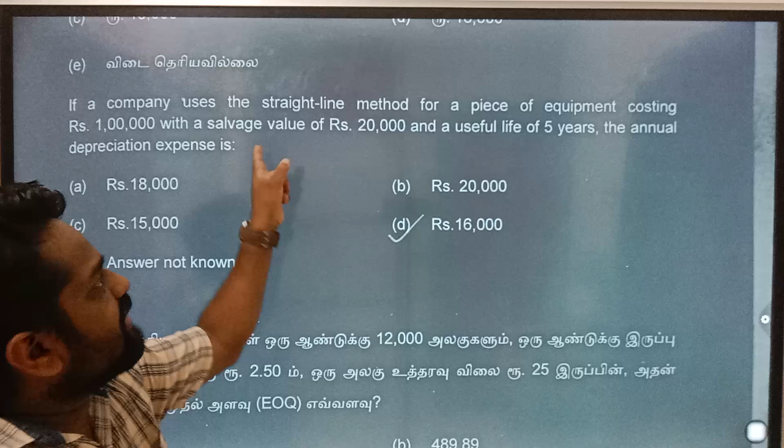Next, again a problem. If a company uses the straight line method for a piece of equipment costing rupees 1 lakh with a salvage value of rupees 20,000, and a useful life of 5 years, the annual depreciation expense? In the question, the confusion is, what is salvage value? Salvage means current value, current book price. Okay, so depreciation is 80,000. So straight line method, 80,000 by 5, 16,000. Answer is D.

10th question, for a product with a demand of 12,000 units per year, holding cost of rupees 2.50 per unit per year and ordering cost of rupees 25 per order, what is the economic order quantity? Economic order quantity direct equation, root of 2DC by C. Okay, அந்த equation கொடுத்திருந்தா டைரக்ட்டா ஆன்சர் கிடைக்கும். Answer is B, 489.89.

Next, a company uses ranking method of job evaluation. If the highest ranked job is given a score of 100 and lowest rank a score of 40, what score would a job receive if it was ranked in the middle of a set of 9 jobs? ஸோ ரேங்கிங் மெத்தட் தான் கேட்டிருக்காங்க. Next, ஜாபுக்கு ஸ்கோரும் கொடுத்துருக்காங்க. So we are not 100% sure, but the answer is not known.

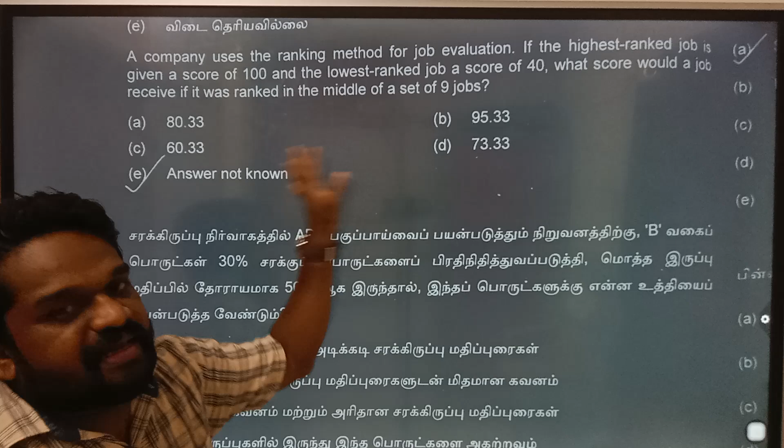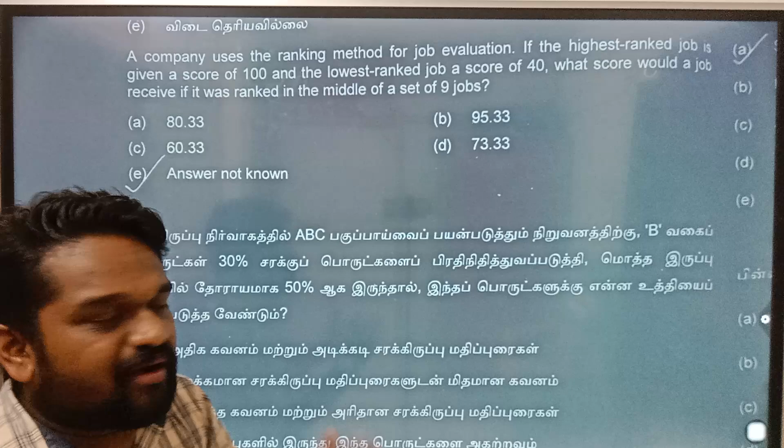It should be not known because ranking method is a qualitative method. No quantity; quantity means points, we don't give them. So you cannot ascertain a job by assigning points or score. So ranking method is a qualitative method. It does not involve points. So answer not known. Okay, so answer is E.

12. For a company employing the ABC analysis in inventory management, if B category items represent 30% of the inventory items for a cost of 50% of total inventory, then what strategy should be used for these items? Inventory monitor பண்றதுக்கு என்ன strategy யூஸ் பண்ணனும் அதான் கேட்டிருக்காங்க. The answer is moderate focus with regular inventory reviews. Moderate focus means it is a B item. Regular inventory reviews because they are 50% of total inventory value. So you need regular inventory reviews also. The answer is B.

Which one of the following is not a form of inventory? Inventory la include ஆகாதது இது எது? Raw materials is a part of inventory. Work in process is a part of inventory. Finished goods, again part of inventory.

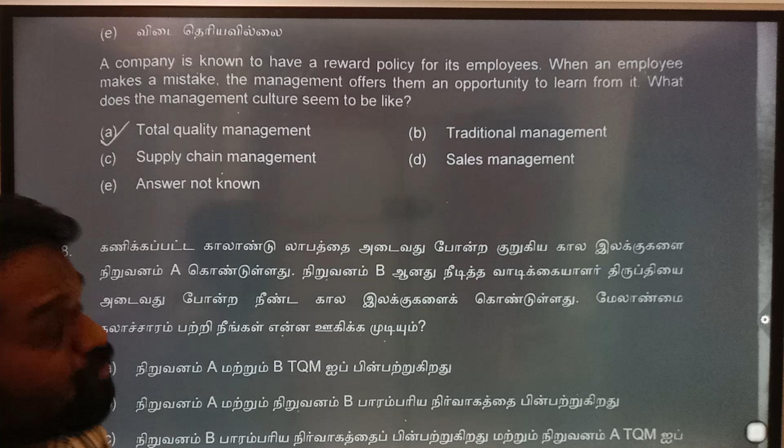Next, a company is known to have a reward policy for its employees. When an employee makes a mistake, the management offers them an opportunity to learn from it. What does the management culture seem to be like? So, a very friendly management culture. Oru traditional approach illa. Adinala, this is a feature of total quality management. Okay, baaki irukku onnu illa. Traditional management onnume illa. Idu rendum not related to this question. So, answer is A.

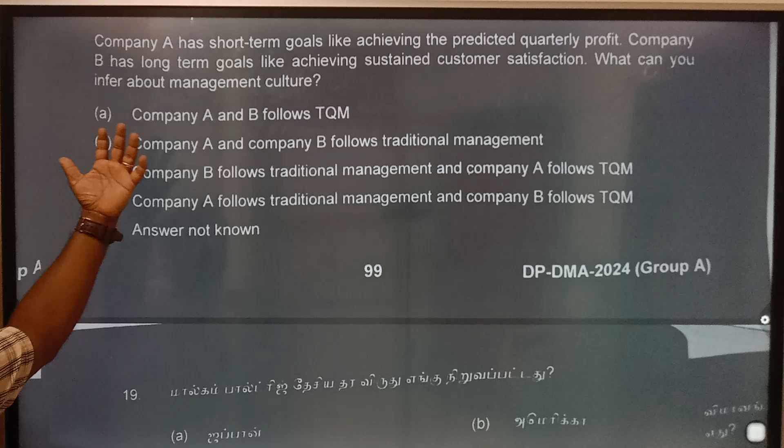Next question. Company A has short-term goals like achieving the predicted quarterly profit. Company B has long-term goals like achieving sustained customer satisfaction. ஒருவருக்கு quarterly profit அது மட்டும் தான் aim. அடுத்தவருக்கு sustained customer satisfaction. What can you infer about management culture? இது short term, இது long term. Total quality management is a long-term feature. So D is the answer. Company A follows traditional management, short-term aim, and company B follows TQM because of long-term goals. So the answer is D.

Next one, 23. In industrial engineering, what does the term method study aim to achieve? Method study க்கு என்ன aim? So what's the objective of method study? D. Optimize work processes. That's the answer. Next question. What does JIT, just in time production, aim to reduce? Answer is inventory levels. Inventory levels reduce பண்றது தான் lean manufacturing, just in time.

24. What is the main purpose of work measurement in industrial engineering? Work measurement oda purpose enadu? To determine the standard time for a task. So the answer is D. To determine the standard time for a task.

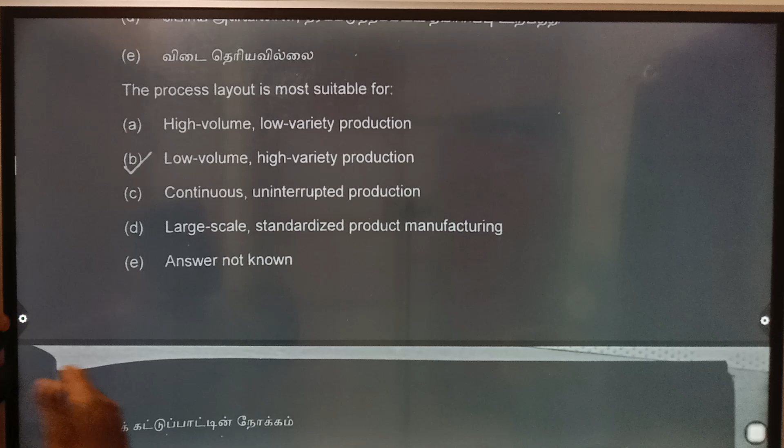25. The process layout is most suitable for? Process layout எந்த மாதிரி கம்பெனிக்கு suitable இருக்கும்? Low volume high variety production, different types of production பண்றாங்க, ஆனா கொஞ்சம் தான். So low volume high variety production தான் process layout suitable. So the answer is B.

26. Quality control aims to identify and correct defects in the finished product. This is not total quality management, it's quality control. TQM il varnadilla, ana idu oru part of TQM. So idoda objective identify and correct defects in the finished product. So answer is A. 27. In the context of industrial safety management, PPE stands for personal protective equipment. The answer is B.

28. The standard time of an operation is defined as the time taken by a... It's an equation, ஆனா words ல கேட்டிருக்காங்க. Standard time எப்படி சொல்வாங்க? A trained worker to perform that operation while working at a steady pace; this is a typo. Constant speed ல ஒரு trained worker work பண்ணும்போது எவ்வளவு டைம் எடுக்கும், அதுதான் standard time. So the answer is B.

Next, the actual time taken by a worker to complete a specific operation or task is known as observed time. Actual time stop watchல observe பண்றாங்க, that is observed time.

Next, analysis of man work method by using a motion picture camera with a timing device in the field of view is known as. Camera la use பண்ணி நீங்க film graph பண்ணுவாங்க, அந்த ஸ்டடிக்கு என்ன சொல்லுவாங்க? Motion study. Okay, motion study.

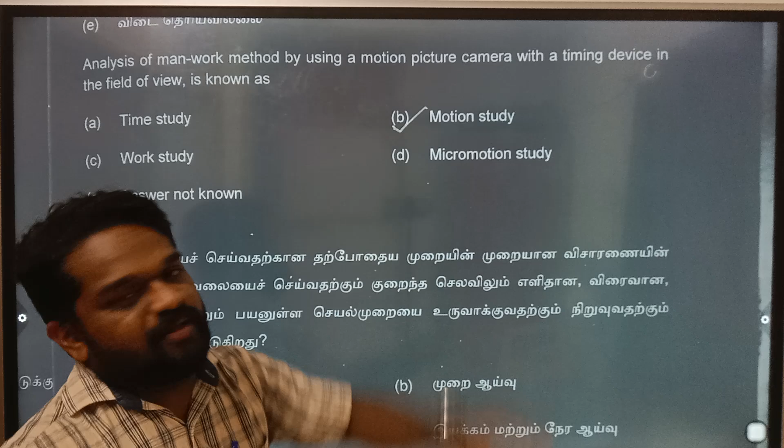Answer is box B. Next, study of the systematic investigation of the existing method of doing a job in order to develop and install an easy, rapid, efficient and effective procedure for doing the same job and at low cost is known as method study. Work study oda two elements, method study and time study.

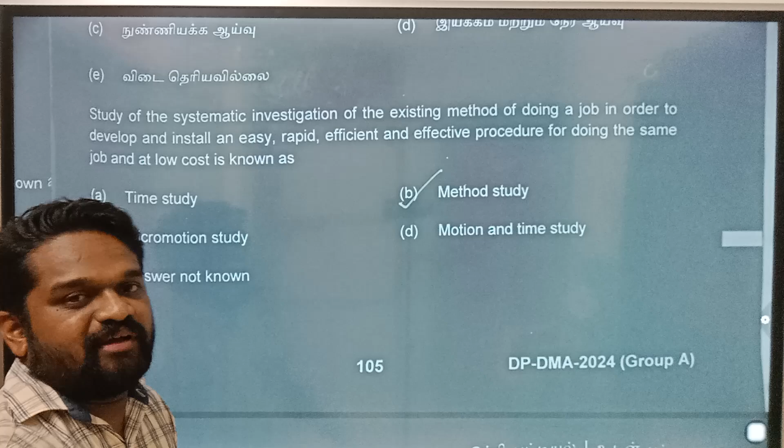32nd, இதுதான் match the following தான் ரொம்ப easy. A man is doing some productive work, so he is doing some operation. So O means fifth one, O circle தான் symbol இருக்கும். A lot is moving from one place to another, transportation, arrow. So A5 B4. Then a hand is not accomplishing anything and is measuring the dimension of the part.

So last one is 1. The answer is D. A5 B4 C2 D3 E1. Predetermined motion time systems (PMTS) include.

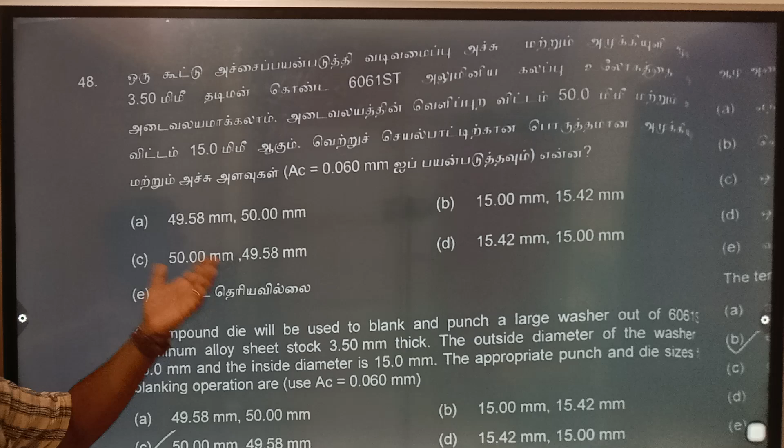Next, 48. ஒரு problem தான். So problem என்ன கேட்டிருக்காங்க? A compound die will be used to blank and punch a large washer out of 6061ST aluminum alloy sheet stock 3.5 mm thick, outside diameter 50, inside diameter 15. Appropriate punch and die sizes in blanking operation கேட்டிருக்காங்க. Constant கொடுத்திருக்கு. So answer is C.

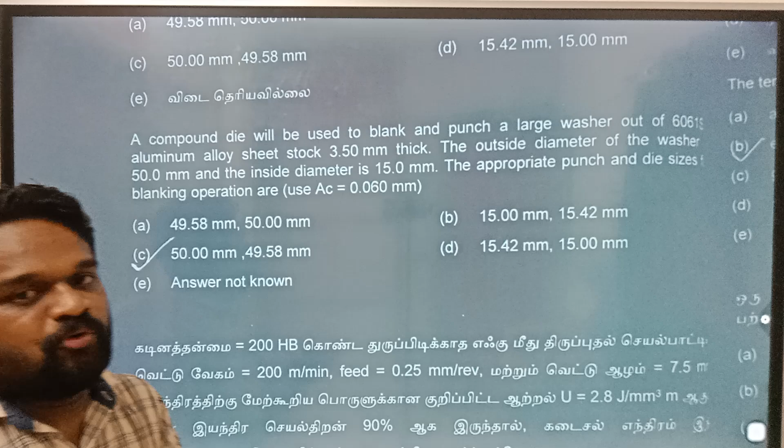49. Again a problem: in a turning operation on stainless steel with hardness 200 HB, feed கொடுத்திருக்காங்க, depth of cut கொடுத்திருக்காங்க. The specific energy for the above material to machine is U. அதுவும் கொடுத்திருக்காங்க. Power the lathe will draw, அதான் கண்டுபிடிக்கணும். Efficiency 90% கொடுத்திருக்காங்க. Again equation இருக்கு. அதை போட்டு calculate பண்ணினா you will get 19.44 kilowatt. So answer is D, 19.44 kilowatt.

Next question. The term deep grinding refers to external cylindrical creep feed grinding with high speed. Answer is B. Next, gear cutting on a milling machine using an involute profile cutter is gear forming process. Answer is B.

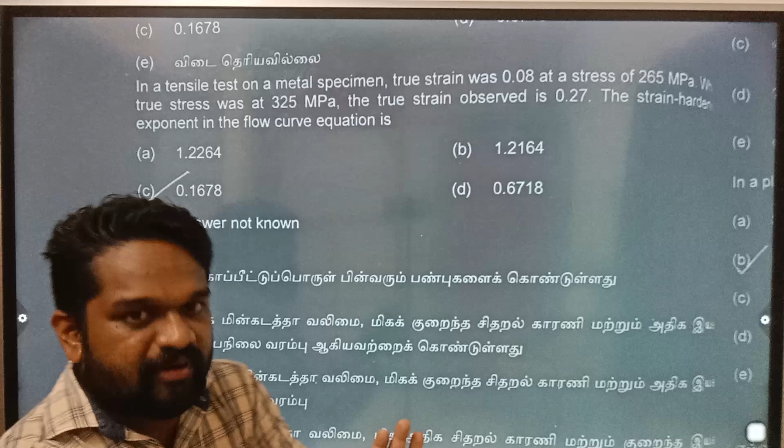52nd, in a tensile test, again a problem on a metal specimen. The true strain was 0.08 at a stress of 265 megapascal. When true stress was 325 megapascal, true strain observed is 0.27. The strain hardening exponent in the flow curve equation is? We have worked out this problem, and I'm not sure you can do it without a calculator. If there are any objections, you can comment in the comment section.

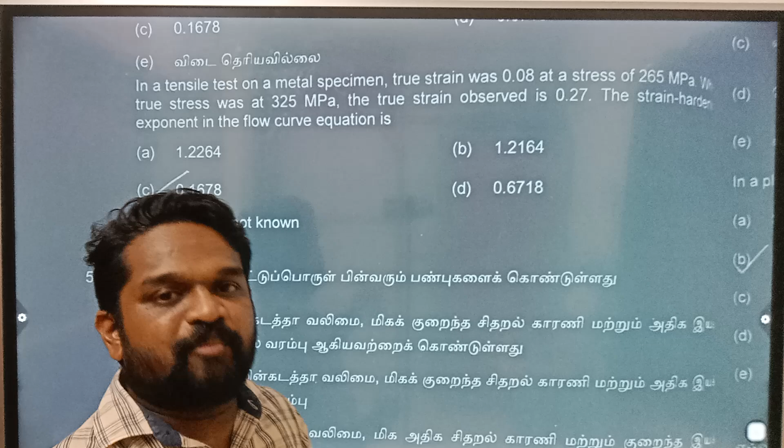53rd, a good insulating material possesses the following properties. Answer is A, having high dielectric strength, very low dissipation factor and high operating temperature range. Next, in a planer machine, what role does the cross rail play? Answer is guides the movement of the cutting tool horizontally. So answer is B.

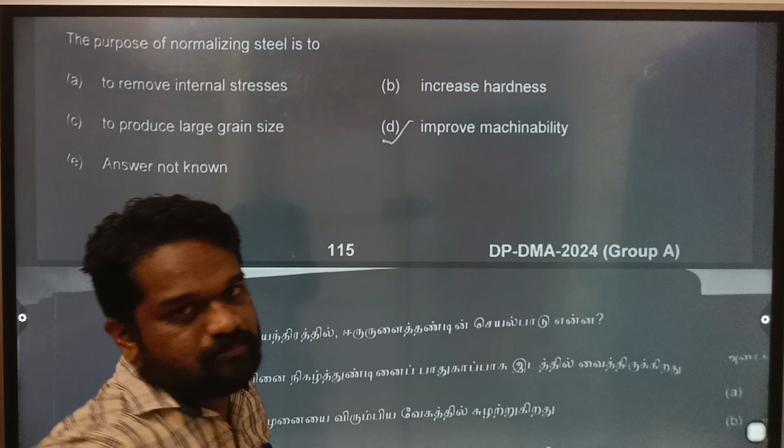Next, the purpose of normalizing steel is to improve machinability. The answer is D. Next, 56. In a drilling machine, what is the function of the quill? Answer is C, provides vertical movement to the drill bit. 57. Normally case hardening is suited for low carbon steel parts. So answer is D.

Next, what is the purpose of coolant in grinding operations? Answer is B, dissipating the heat generated due to friction and shear of the metal. 59. In jig boring, what is the function of the jig? Answer is A, guides the movement of the cutting tool. 60. In press working operation, increasing the clearance between the punch and die typically results in reduced tool wear. Answer is D.

61. Electrical part, the unit of electric potential is joule per coulomb, J by C. Answer is A. In the international system of units, the unit of inductance is Henry, H. Answer is C. Which of the following is not a type of induction motor? Answer is brushless DC motor, D. 64. The efficiency of an induction motor is highest when it operates at full load. Answer is A. 65. The speed of an induction motor is primarily determined by number of stator poles. Answer is B. Which law describes the force experienced by a current carrying conductor placed in a magnetic field? Answer is D, Lorentz force law.

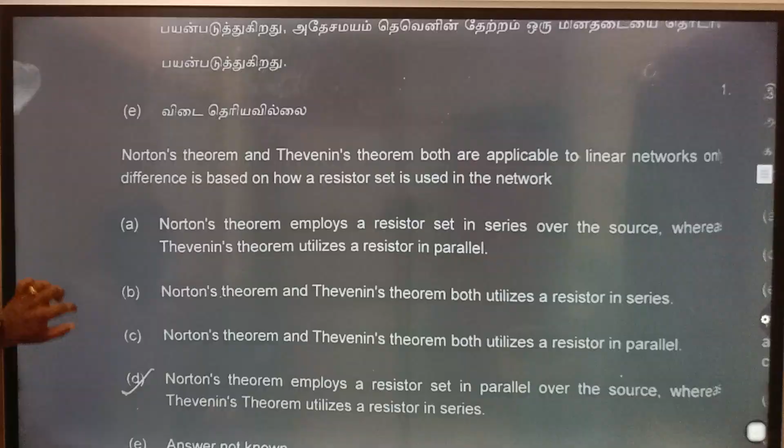Which of the following theorems is known as the dual of Thevenin's theorem? The answer is Norton's theorem, D. 71. Two coils X and Y are placed in a circuit such that a current changes by 3 amps in coil X and a magnetic flux change of 0.9 Weber occurs in coil Y. The mutual inductance of the coil is 0.3 Henry. Okay, answer is B.

72. A three-phase induction motor has 6 poles and operates with a slip of 0.06. The speed of the stator magnetic field: answer is 1200 RPM. Okay, I hope you can mark it in your question paper. 1200 RPM. 73rd. When measuring power in a single phase circuit using a wattmeter, which quantities need to be measured simultaneously? Answer is voltage and current.

Next. Which statement is true about the neutral wire in a three-phase four-wire system? The answer is B. It carries a return current for all the three phases. Okay. 75. The speed of the rotating magnetic field in an induction motor is always higher than the rotor speed. Answer is A. 76. In which region of operation does a diode act as an open circuit? Answer is reverse bias. D.

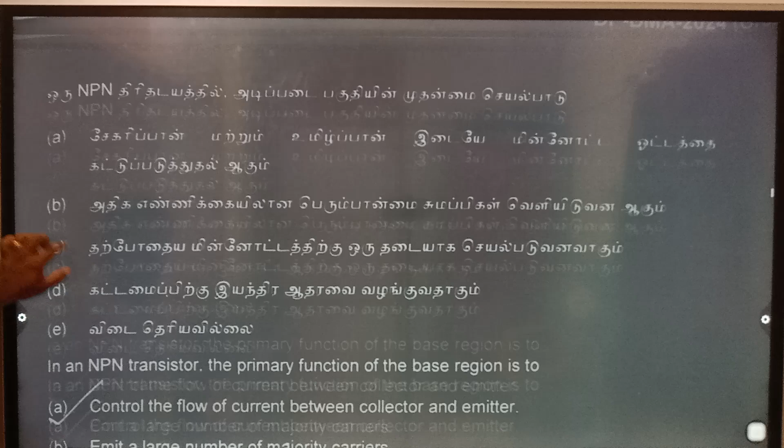77. A silicon diode typically has a forward voltage drop of around 0.7 volt. Answer is B. In an NPN transistor, the primary function of the base region is to: answer is A, control the flow of current between the collector and the emitter. Okay. 79. A logic gate with two inputs A and B produces a high output only when both A and B are high. The gate is called AND gate. Answer is C, AND gate. 80.

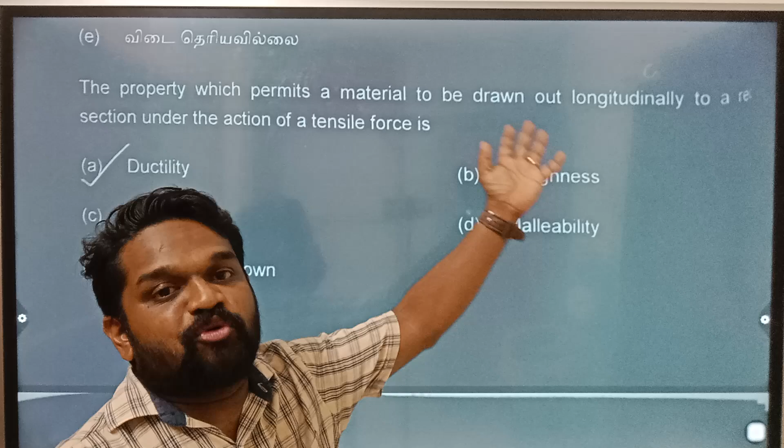A 10 nF capacitor is connected in parallel with a 22 nF. Total capacitance 32 nF. Answer is D, 32 nF. 81st question. The property which permits a material to be drawn out longitudinally like a wire. Adange confuse pandranga longitudinally. So longitudinally means along the length. The answer is ductility. Next. The ability of a material to absorb energy within the elastic region is called resilience. B is the answer.

Okay, resilience. Then 83rd. Hooke's law essentially defines the elastic limit. Stress by strain is equal to a constant up to the elastic limit. So C is the answer, elastic limit. 84. In which case is longitudinal strain possible? Only in solids. Answer is D. Next. If the thickness of plate is negligible when compared to the diameter of the cylinder, then it is called thin cylinder. Okay, answer is B. Thin cylinder.

Again, for a thin cylindrical shell, the ratio of hoop stress to longitudinal stress is option A, 2. Next one, going to bending moment diagram. The maximum bending moment when a point load W is acting at the free end of a cantilever beam of length L. The answer is WL. You can draw the diagram and find it, or memorize it at your convenience. The answer will be C, WL.

Next question. When a body is subjected to 3 mutually perpendicular stresses of equal intensity, the ratio of direct stress to the corresponding volumetric strain is known as bulk modulus. Answer is D. Next question. If the modulus of elasticity for a given material is twice its modulus of rigidity, then the bulk modulus is equal to 2C/3.

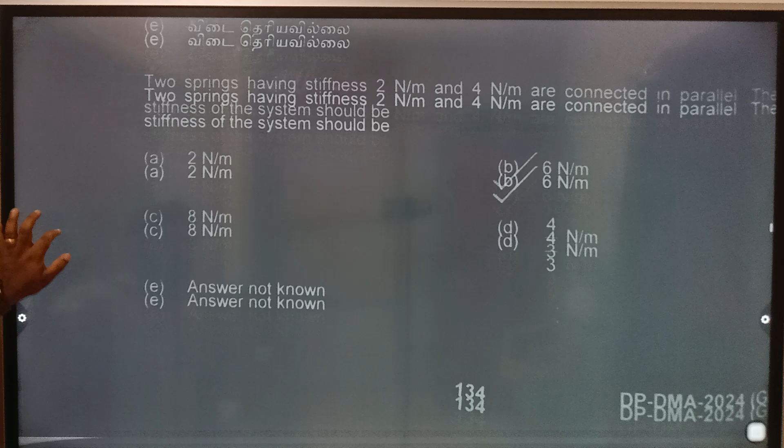Next. The strength of the beam mainly depends upon section modulus. Answer is D, section modulus. Next one. Two springs having stiffness 2 Newton per meter and 4 Newton per meter are connected in parallel. The equivalent stiffness of the system gets added: 6 Newton per meter. Answer is B. Next.

Which of the following describes the deformation of a beam under simple bending? Simple bending is deformation eppadi nadakum due to bending and shearing. Okay, the answer is C. 96.

In torsion, the maximum shear stress occurs at the outer surface of the shaft. It is proportional to distance from the origin. Okay, so outer surface la maximum distance, so ange da maximum shear stress irukum.

Next, 97. Shear force in a thin cylinder refers to. Thin cylinder la shear force eppdina cylinder oda rendu layer அப்படியே move பண்ற tendency irukum. So the answer is force causing one layer of the cylinder to slide over another layer. Answer is box B. Next, 98.

Which of the following types of gear drives is known for transmitting motion and power between perpendicular and non-intersecting shafts? Evidently, these two are not. Rack and pinion la rack oda shaft edhu confusion irukanga. Rack oda shaft வந்து rack oda length படி தான் அப்படினா answer is rack and pinion. ஆனா அப்படி எடுக்க முடியாது, எங்கே அப்படி ஒரு reference காணல, அதனால the answer is marked as answer not known.

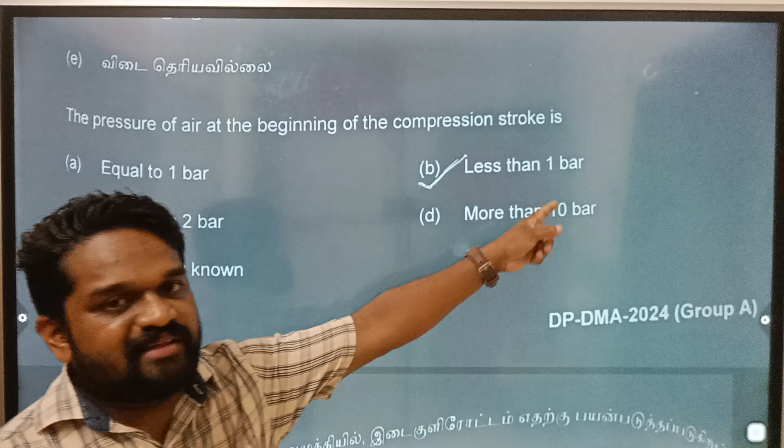105. The pressure of air at the beginning of the compression stroke. It can be equal to 1 bar and it can be less than 1 bar. Accurately speaking, it will be less than 1 bar. கரெக்டா அந்த atmospheric pressure உள்ள வந்து அப்படியே ஈக்குவல் ஆன அவ்வளவு டைம் கிடைக்காது. அதனால we say it is less than 1 bar. So the answer is box B.

Next question. In a two-stage compressor, intercooling is used for. Intercooling எதுக்கு யூஸ் பண்றாங்க? Reducing work of compression in second stage. Okay, so C is the answer. Reducing work of compression in second stage.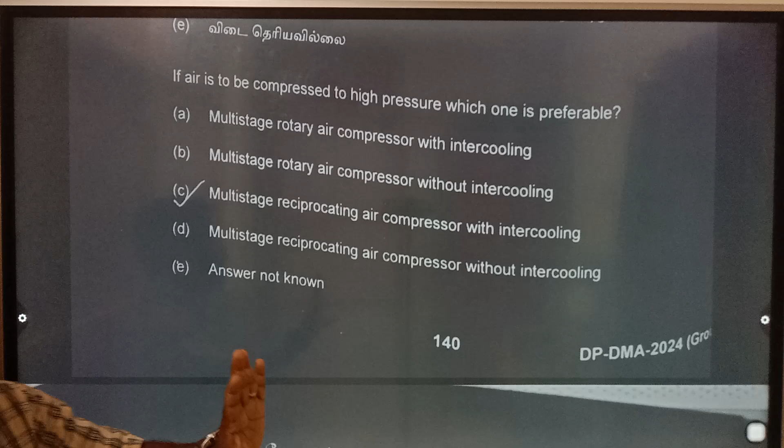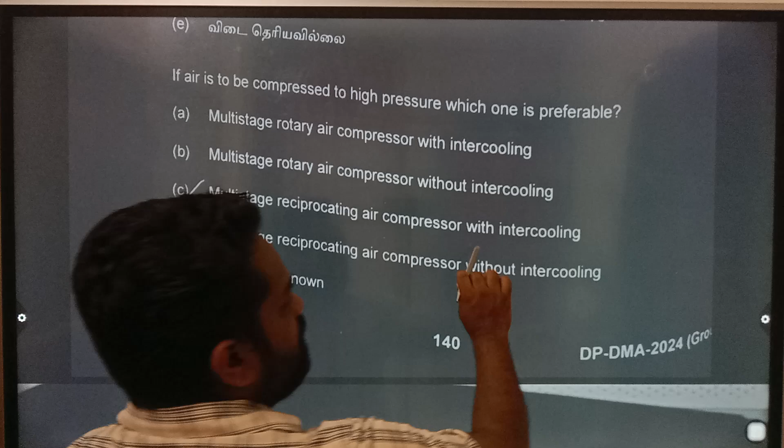Next, 107. If air is to be compressed to high pressure, which one is preferable? High pressure க்கு convert பண்ணோம் அப்படினா எப்போதுமே reciprocating compressor தான் நல்லது. Okay, உங்களுக்கு flow continuous கிடைக்கணும்னா go for rotary. இங்க high pressure தான் கேட்டிருக்காங்க. So multi stage reciprocating air compressor with intercooling. Multi stage means higher pressure levels க்கு போயிடலாம். அதனால with intercooling work done கம்மியா இருக்கும்.

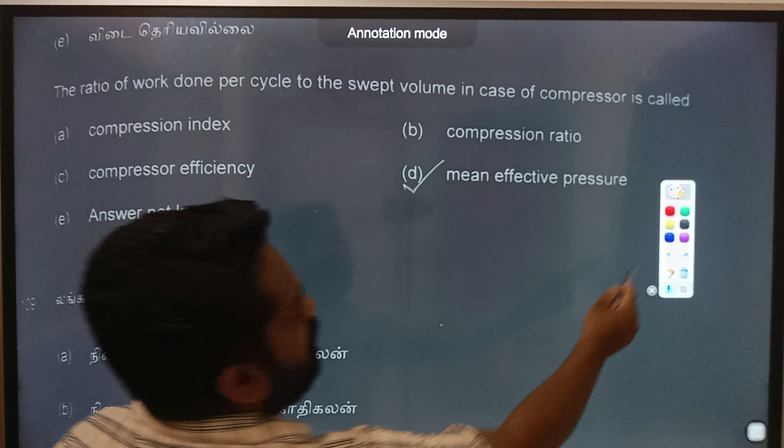To the swept volume தான் கேட்டிருக்காங்க ratio. So swept volume ஓட யூனிட் மீட்டர் கியூப். So getting cancelled, it will become Newton per meter square. Newton per meter square இதுல mean effective pressure ஓட யூனிட் தான். So the answer will be mean effective pressure. அப்படி கூட கண்டுபிடிச்சிடணும். So answer is D, mean effective pressure.

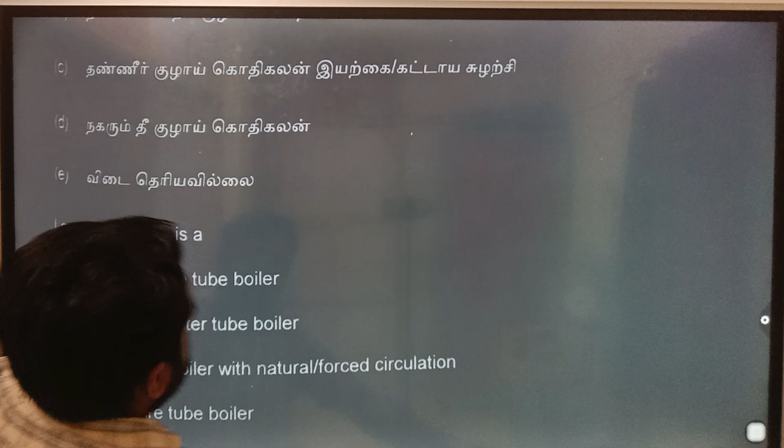Then Lancashire boiler is a stationary fire tube boiler. Out of the options, this is the right one. Option A, stationary fire tube boiler. Next, which is not identical for an atom and an isotope. Atom isotope proton or atomic number correct ஆகும், same இருக்கும், ஆனா mass number different இருக்கும். So the answer is A.

111. The most commonly used moderator in nuclear plants. Actually, most commonly used moderator கேட்டா without a second thought, the answer is light water or regular water. Okay, ஆனா இங்க அது ஆப்ஷன்ல இல்ல, அதனால graphite. Okay, so the answer is B.

112. The optimum value of vane exit angle for a centrifugal pump impeller is 20 to 25 degrees. Okay, answer is 20 to 25 degrees. Next, the example of bent tube boiler, that is Stirling boiler, that's the answer. Answer is B, Stirling boiler.

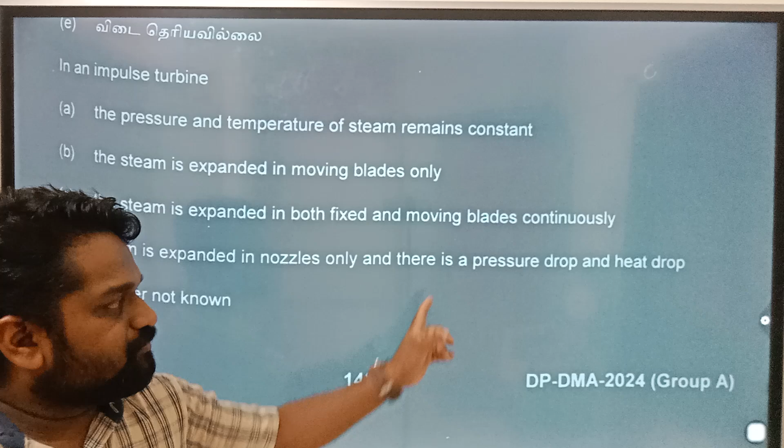Next, in an impulse turbine, out of these options, this is the correct one. Option D, steam is expanded in nozzles. Nozzle மட்டும் தான் expansion or pressure change. Nozzle க்கு வெளியே வந்து across the moving blades, no pressure drop. Okay, nozzles only and there is a pressure drop and heat drop in nozzles. So answer is D.

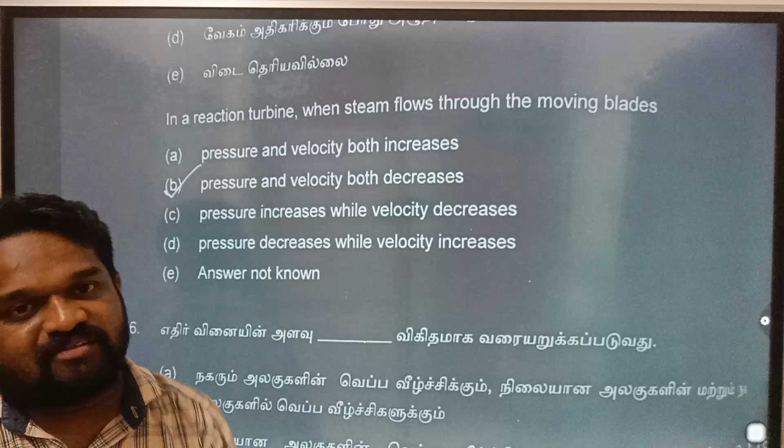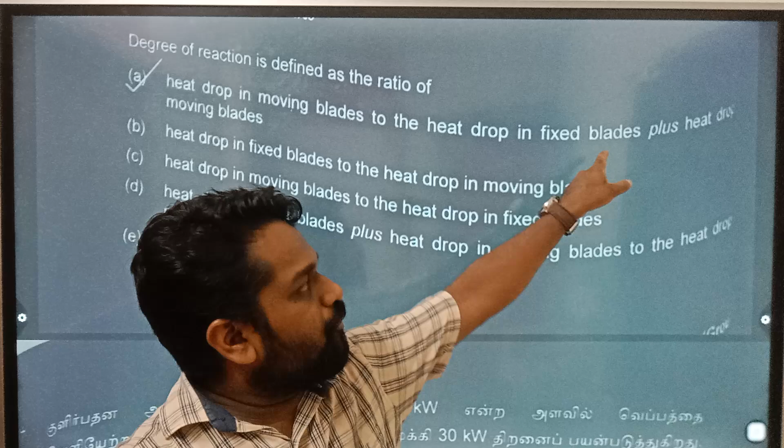116. The degree of reaction is defined as a ratio of. The answer is A. Moving blade across ana heat drop or enthalpy drop by total enthalpy drop. Inge total enthalpy drop ku fixed oda moving blade oda plus panni sollirukanga. Okay, adanal option A is the answer. Heat drop in moving blades to the heat drop in fixed blades plus heat drop in moving blades.

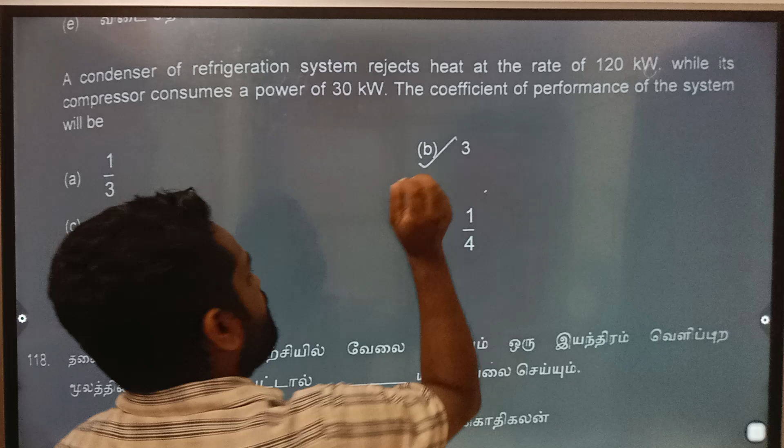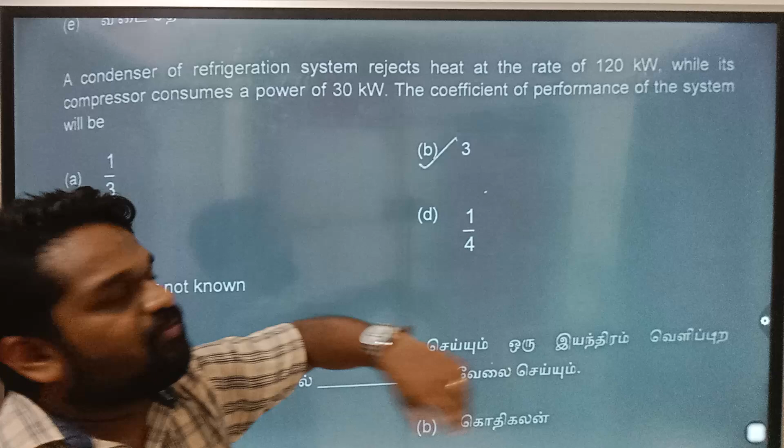Next 117. A condenser of refrigeration system rejects heat at the rate of 120 kilowatt while its compressor consumes a power of 30 kilowatt. The coefficient of performance COP தான் கேட்டிருக்காங்க. After calculation you will get answer as 3. இங்கே refrigerating effect direct கொடுக்கல. Rejects heat at the rate of, that is not refrigerating effect. Absorb பண்றது தான் refrigerating effect. So அது நீங்க மைண்ட் வைக்கணும். So after calculation answer will be 3.

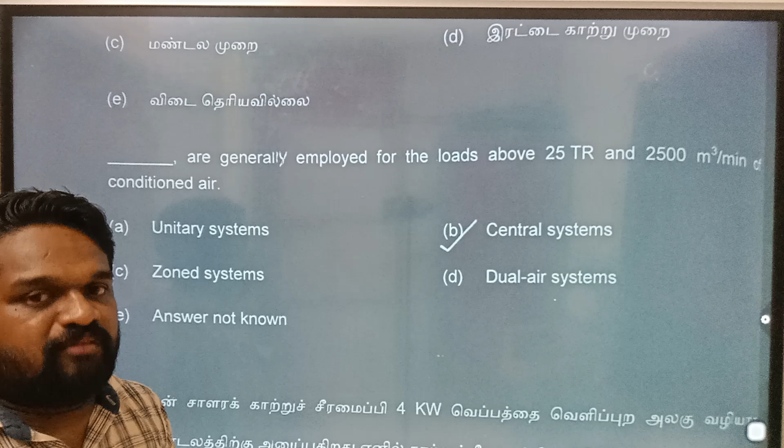118. If a machine working on reversed Carnot cycle. Carnot cycle-ல work தான் வெளியே வரும். ஆனா reverse Carnot cycle means you are giving the work. So it will act as a heat pump. Option A. Next 119. Dash are generally employed for the loads above 25 ton refrigeration. 25 ton refrigeration 2500 meter cube per minute discharge ku mele venamna you will be using centralized air conditioning system or central systems. Okay, answer is B.

120. One ton window air conditioner rejects 4 kilowatt of heat via outdoor unit to the atmosphere. The COP of the air conditioner. COP தான் கேட்டிருக்காங்க. Answer after calculation will be C. Correct answer is C.

Next, which of the following language is understandable by computers? C. Computer understands only binary language. Then 122. Which of the following is the brain of the computer? Primary classes ne paathurukum nenikira CPU. Brain of the computer is called CPU, central processing unit. 123. Which of the following device use positional notation to represent a decimal number? Answer is abacus.

124. What is the extension of notepad? Notepad oda extension .txt, text. Okay, answer is A. 125. Input devices that use a special ink that contains magnetizable particles of iron oxide are. Iron oxide ink use பண்ற input devices அது MICR. Okay, answer is C, MICR.

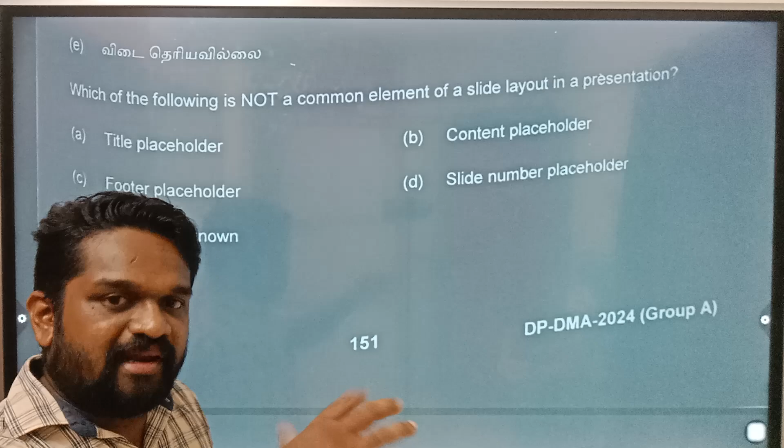The answer is E, answer not known. Next 134. What does the term CC?

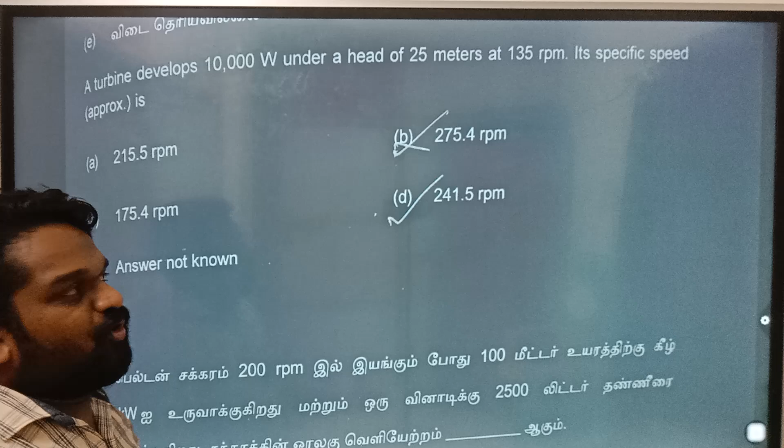149. Power required to drive a centrifugal pump is given by? The answer is rho QH by efficiency. Okay. Answer is A. Sorry, not rho, W. Answer is WQH by efficiency. A turbine develops 10,000 watt under a head of 25 meters at 135 RPM. Its specific speed is approximately? Putting in the specific speed equation, it will be coming 241.5. Answer is D.

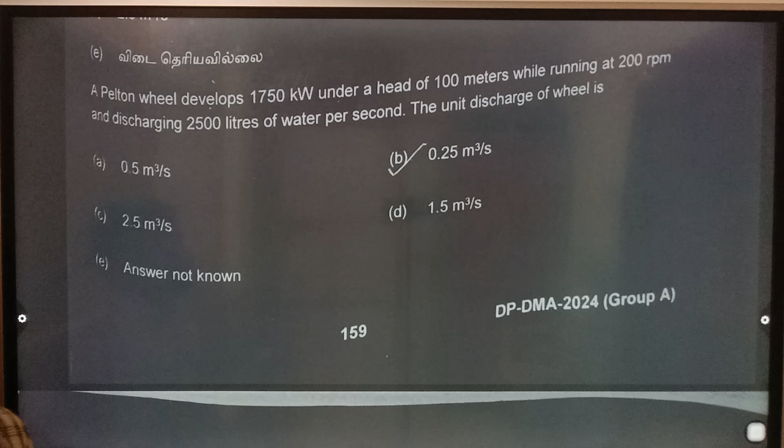Next. A Pelton wheel develops 1750 kilowatt under a head of 100 meters while running at 200 RPM and discharging 2500 liters of water per second. The unit discharge is nothing but 0.25 meter cube per second. It's a calculation. When you calculate with the equations, you will get 0.25 meter cube per second.

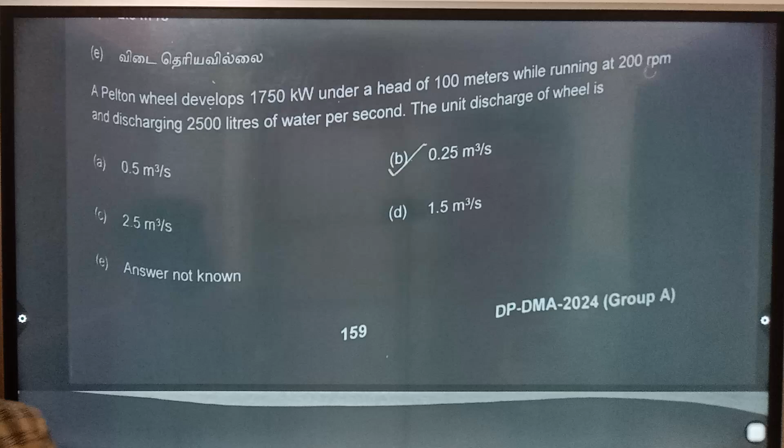So answer was B 0.25 meter cube per second. Next question. Reaction turbines are used for. Answer is A. Low head and high discharge. 153. Francis turbine is an inward flow radial type turbine. Okay. Francis turbine is an inward radial flow turbine. So C is the answer. Next. For flood control and irrigation applications, the pump generally used is axial flow pump. Okay. Low head. Axial flow type pump. Answer is D.

155. Whitworth quick return mechanism is obtained by inversion of slider crank mechanism. Answer is A. Slider crank mechanism. 156. In crank and slotted link mechanism, the cutting angle is 220. What should be the return stroke angle? Cutting angle, forward stroke 220. Return, idle stroke angle 140. You have to memorize it. C. 140.

157. In centrifugal pump, the number of vanes in impeller varies from 2 to 8. Actually, precisely saying, the closest answer is 2 to 6. That's why they marked B. The answer is B. B, 2 to 6.

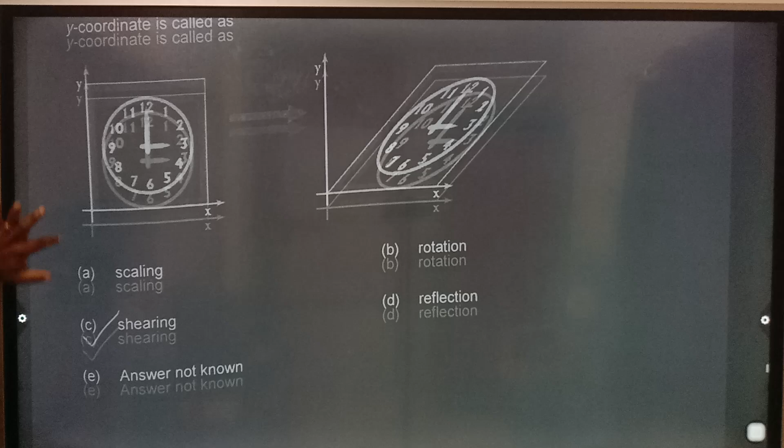Next. In CAD, name the transformation which moves points to the right in proportion to their y coordinate. Like in the strength of materials. Shear. So answer is shearing. C. Shearing is the answer. Next question. The number of tangents required to describe cubic splines. Cubic spline describe பண்றதுக்கு ஒரு tangent போதும். B, 1.

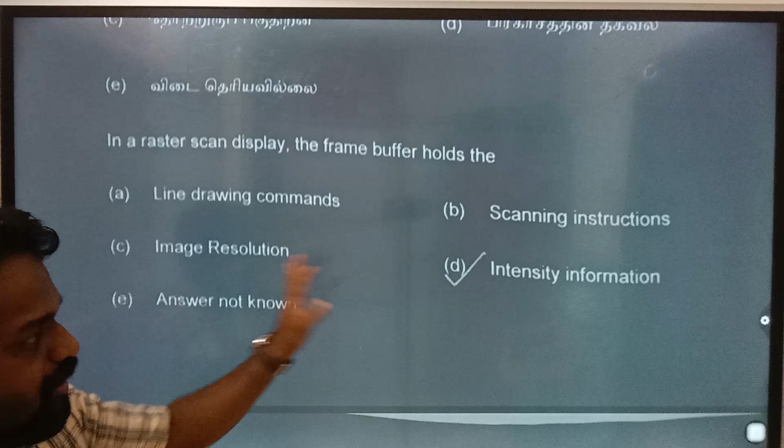164. Is it visible, this question? Yes. Okay, I guess so. In a raster scan display, the frame buffer holds the intensity information. Confusion will be between image resolution and intensity information. Most appropriate answer is intensity information. Answer is D.

The function of a tacho generator in CNC machine is none of the above. Actually, speed measure பண்றதுக்கு தான். Okay. So அது இங்கே இல்ல ஆப்ஷன்ல, அதனால D, none of the above. D is the answer. Next. A revolved feature is generally used to create solid models of dash objects. Axisymmetric. Cylindrical objects are axisymmetric. Symmetric about an axis. Okay.

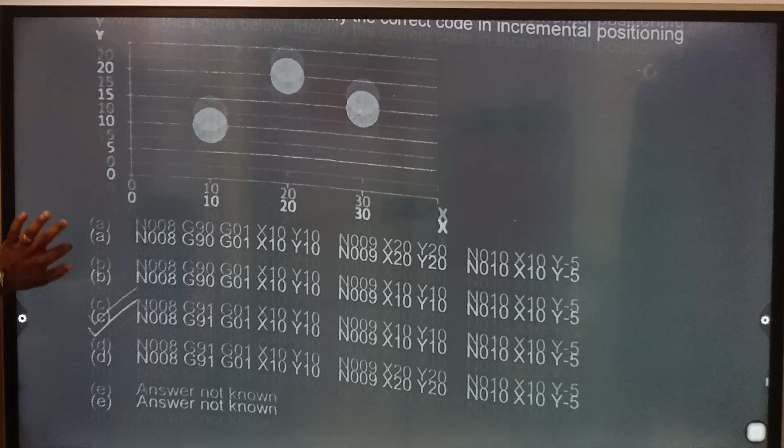Now, 3 holes are to be drilled using a CNC drilling machine. The coordinates of holes are shown in the figure below. Identify the correct code in incremental positioning. So, incremental positioning சொல்லும்போதே G91 தான் வரும். So, அதில் இந்த coordinates எல்லாம் பார்த்தா answer is C. C தான் answer.

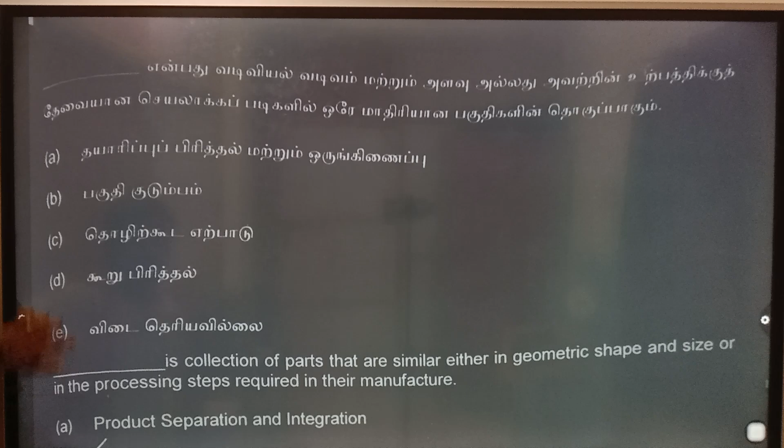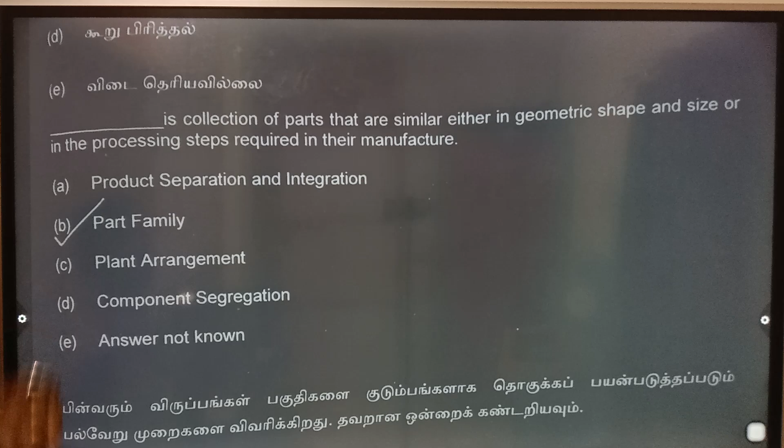Next. Dash is a collection of parts that are similar either in geometric shape and size or in the processing steps required in the manufacture. Group technology is the question. Part family. Adukku peru part family. Answer is B. Next. The following options describe the various methods used for grouping the parts into families. Part family classify பண்றதுக்கு என்னெல்லாம் யூஸ் பண்ணுவாங்க? அதுல incorrect ஆனது எது? Product delivery order. It's not related to part family or classification. So answer is product delivery order.

170. The part programming code G90 signifies programming in absolute coordinates. G91 is for incremental coordinates, already asked in the question. So answer is C, absolute coordinates. 171. Opitz system, 5th digit. Digit 5 corresponds to auxiliary holes, teeth and forming. C is the answer. Next, the CNC part programming code G32 represents thread cutting. The answer is B.

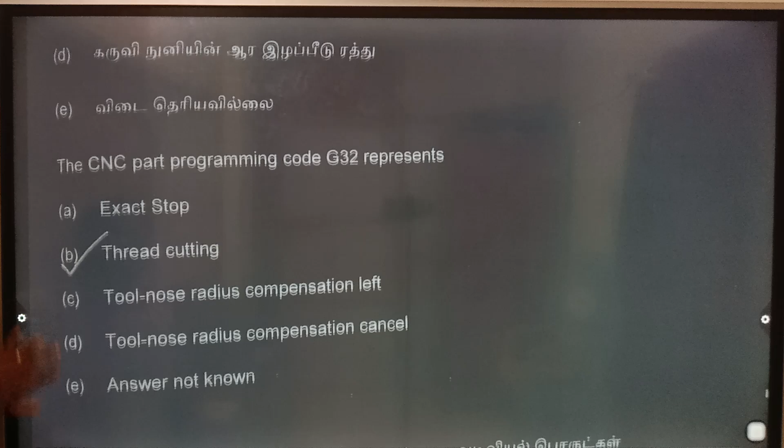Next, the fundamental geometrical entities in solid modeling: wedge, cone, sphere, ellame. Answer is D. All of the above. Ellame use பண்ணுவாங்க solid modeling. 174. The software that performs the data entry, design, analysis, drafting and manufacturing is called application software. C, application software.

175. Numeric control is a method of producing exact number of parts per hour? Then second option. So answer is B. Is a method for controlling by means of a set of instructions. Numeric control. Computer use panina computerized numerical control, CNC. So the answer is B. Next question. Which code is used to cancel the canned cycle? The answer is G80. G80 is used to cancel the canned cycle. D is the answer.

Next. Which of the following is fixed sequential format? Correct format தான் கேக்குறாங்க. So code பண்ணும்போது இதுதான் correct format. Sequence number, G codes, X and Y positions எல்லாம் அதுல இருக்கு. So B is correct. Answer B. Next, which of the following is not related to retrieval type of CAPP system? Answer is GenPlan. It is a generative type. Baaki ellame retrieval or variant type.

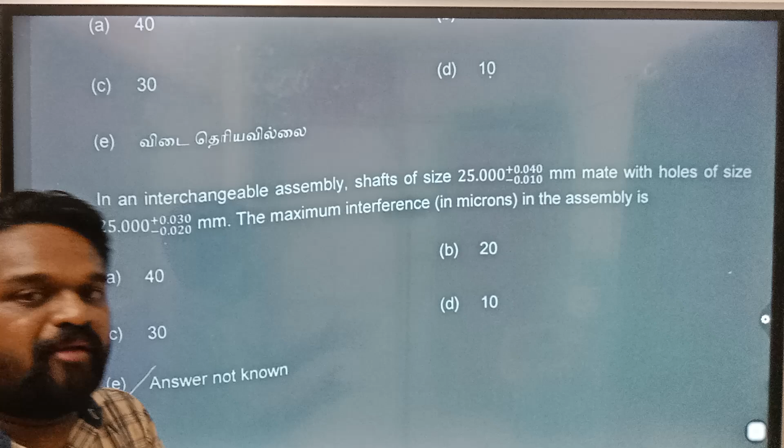In an interchangeable assembly, shafts of size this mated with holes of size this, the maximum interference in the assembly is. Actually, it will be 60 தான் ஆன்சர் வரும் கால்குலேட் பண்ணும்போது. நீங்க கால்குலேட் பண்ணி பாருங்க. You might be confused. இங்க சைன் மாறி போச்சுன்னு நினைக்கிறேன். We guess the question got a printing mistake. It's not minus, it should be plus to get 20 as the answer.